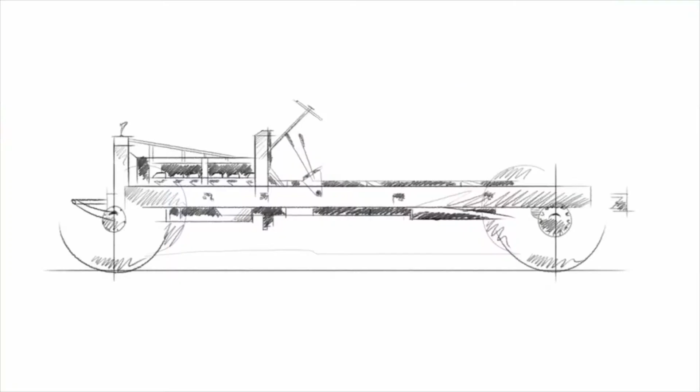The vision of Sir Henry Royce, one of our founding forefathers, was to create the best rolling chassis in the world. The House of Rolls-Royce was built on this bedrock of engineering excellence. The bodywork which enveloped these chassis was the preserve of coach builders who worked hand in hand with the commissioning patron, and these motor cars reflected the character of that coach builder and the personality and wishes of the client.

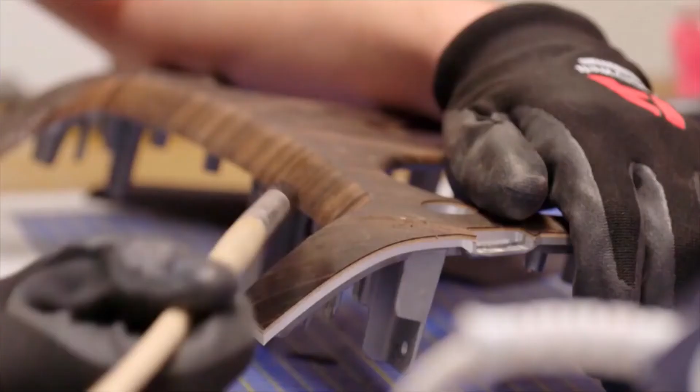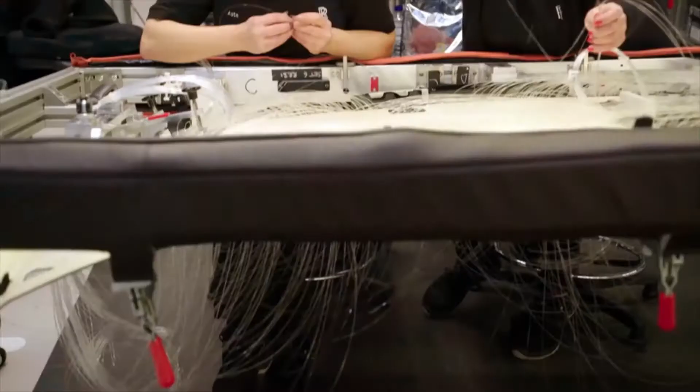Today, Rolls-Royce continues to imbue its products with meaning. Our motor cars serve as a canvas on which clients reflect their personal tastes, express ambitions, and often define legacies. The craftspeople at the home of Rolls-Royce are experts in interpreting the lifestyles of these remarkable women and men, which has resulted in ever more ambitious commissions reaching well beyond the existing scope of our bespoke competencies and resources. This has led us into the rarefied realm of contemporary coach building and the establishment of a permanent department within our company called Rolls-Royce Coachbuild.

It all starts here in this room, the atelier at the home of Rolls-Royce in Goodwood, England. Here we meet with our clients and discuss their thoughts and wishes about their Coachbuild project. Early sketches are drawn by our designers, and formative conversations regarding materials, colors, and other creative aspects of the project are determined.

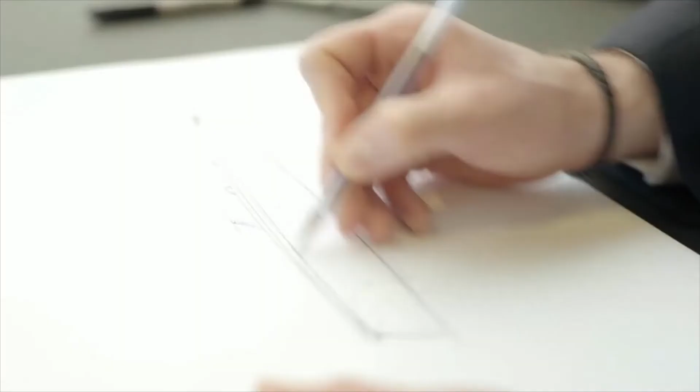Contemporary coach building at Rolls-Royce is the automotive equivalent of haute couture. It is the opportunity to move beyond the usual constraints and bounds and create something truly remarkable. We are an historic brand, and in many ways we are influenced by our 116 years legacy. But we are not bound by it.

In 2017 we introduced Sweptail, which defined the dawn of the contemporary coach building movement. Sweptail set a new watermark of potential and ignited a fascination among a small group of 3 clients who approached us to discover if they, too, could collaborate on a unique coach build commission with us.

Our designers had a long-held ambition to create a contemporary expression of the boat tail typology, where coach builders of old would graft the hull forms of sailing boats onto the rolling chassis of a Rolls-Royce. When the idea of this design direction was proposed, the 3 patrons were of one mind. They shared a single demand: show me something that I have never seen before. And Rolls-Royce Boattail was conceived.

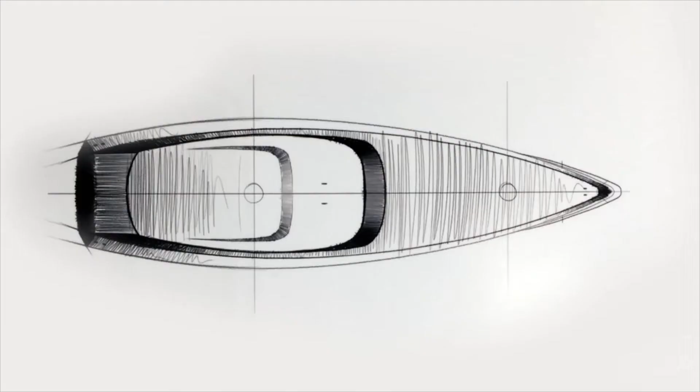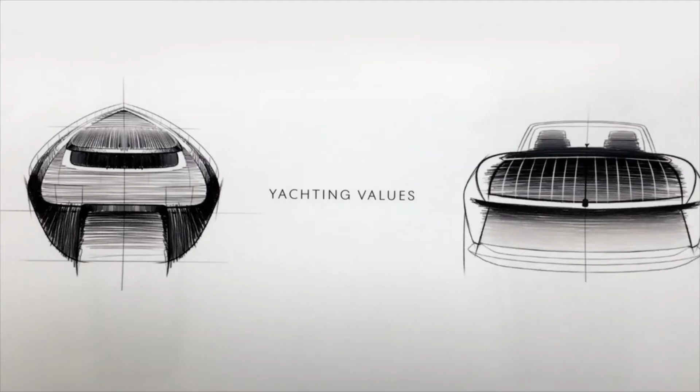Boattail is a particularly special historic body style. It has this unique form with a tapering rear that really converges on centerline. There has never been a contemporary interpretation of this particular body style, and that's what we set out to achieve with the modern commission Boattail.

These 3 clients shared a deep appreciation of contemporary nautical design. J-class yachts, regarded as one of the most beautiful boats ever made, became a touchstone of the design. Together with these clients, an agreement was reached whereby 3 cars would share a common body shape, but each would be highly personalized, reflecting the character of each of the individual commissioning patrons. And the result is truly transformative, an object that makes a permanent statement and sets itself apart from anything that has gone before.

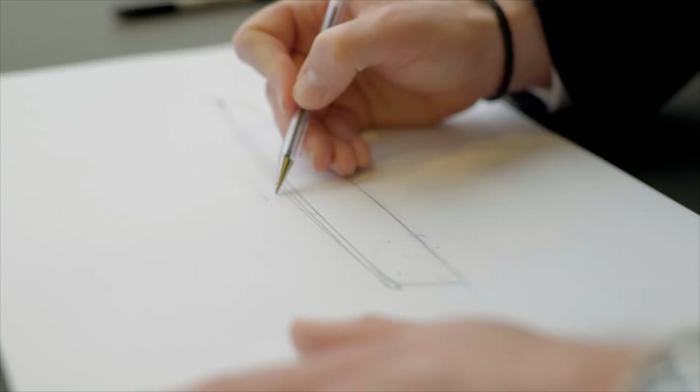We work sequentially, so when we do sketch work, we're in 2D, that comes first. You're working with the overall line work of the car, the key lines of the car, let's say. This very clean, elegant form, very graceful, but at the same time daringly modern. There is this wonderful sense of taper in side view, this beautiful feeling of reduction to the overall surfaces and forms.

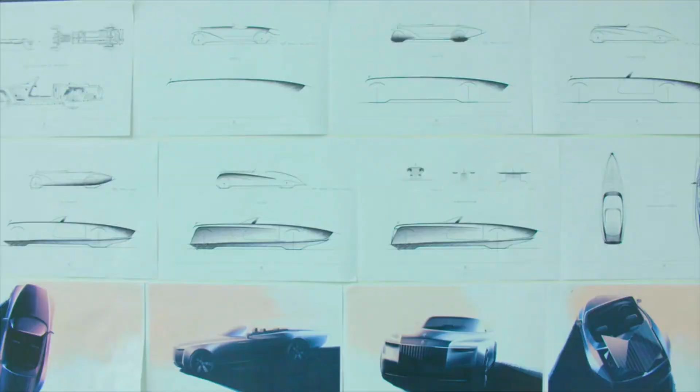Once, together with the client, we have concluded the design on paper, we then create a full-size sculpture of the car in clay.

The clay process, I guess, largely speaking, is working within the last 10% of the design. You're really working with the minutiae of detail, line refinement, and surface control. And actually it's those two characteristics, probably more so than anything, that you are optimizing: quality of line, but with it then the quality of surface. Clay is just a fantastic medium to do that in because it's malleable and also because it's real time. You're doing it there in front of you.

You're moving and there's a certain latitude within which you're working, and then as you near the end of that phase, you're bringing it down to the finer movements and the finer refinements.

A foil, or Di-Noc as it's called in the industry, replicates the real surface of the car, the painted surface of the car.

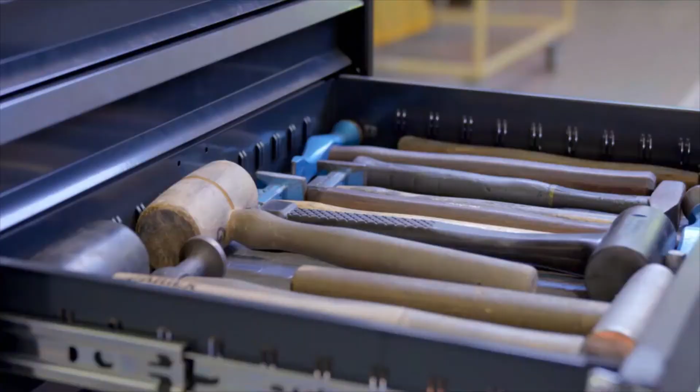A living canvas is created by hand beating and honing metal. And the resulting aluminium body is created with a clarity of surface and continuation of line that is unable to be achieved by machine alone.

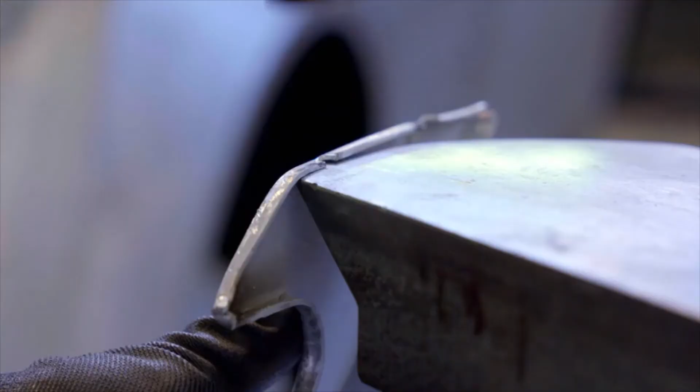The car very purposefully projects a strong vision of modernity, but the real juxtaposition is that this is paired with a very historic process of realization.

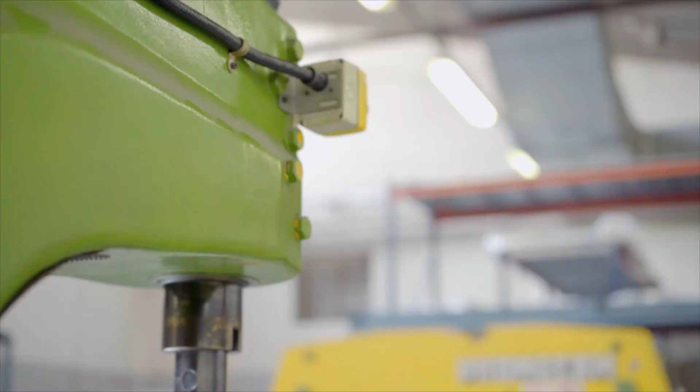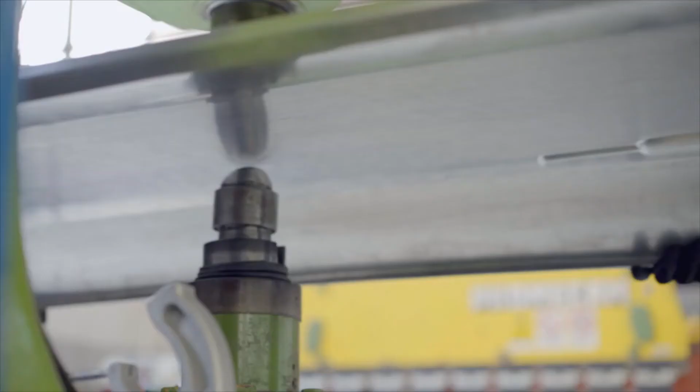The car starts its life with just sheet metal, and first you have to create form to that metal, and that takes place through, in this instance, the hammer forming process.

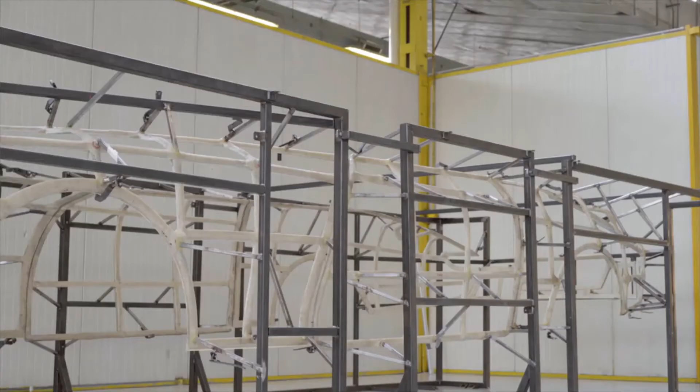We are realizing a car by hand. You would never, through the process of industrialization, expect to find the creative hand of the team, and indeed the clients, still involved at this stage.

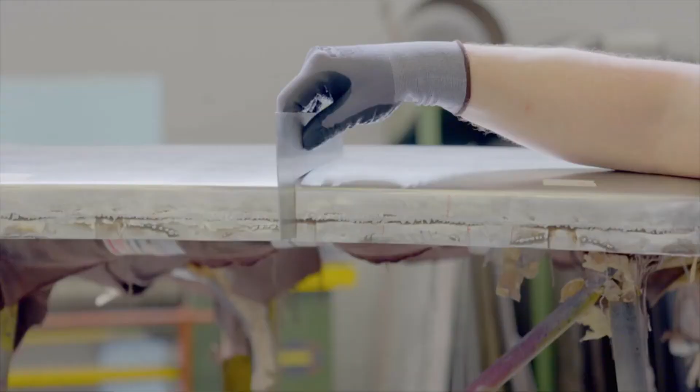Building a car by hand allows the human soul to pass through the hands that are charged with shaping the metal and into the car. Industrialization is clinical, it's carefully controlled, but it's also soulless. And what we are doing here is the complete opposite of that.

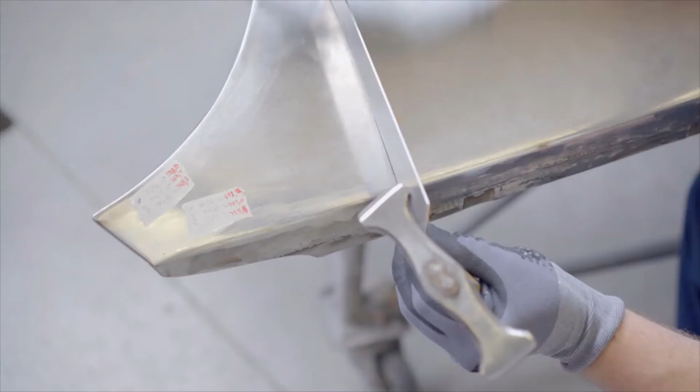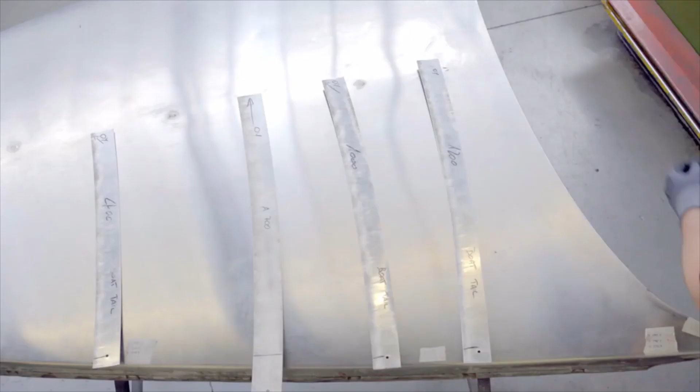I think true perfection can almost be seen as sterile. The car, by way of its definition, is never entirely perfect, but somewhere in there is the perfect imperfection.

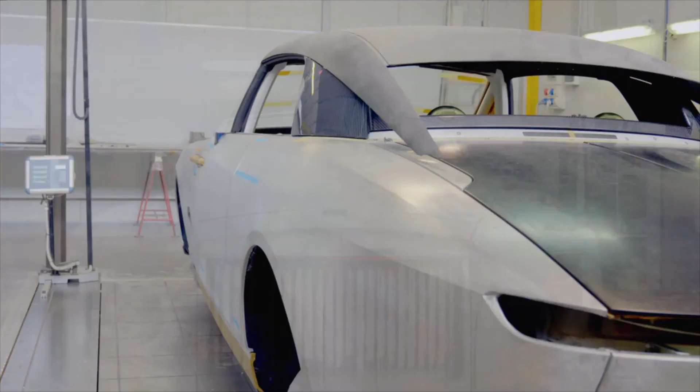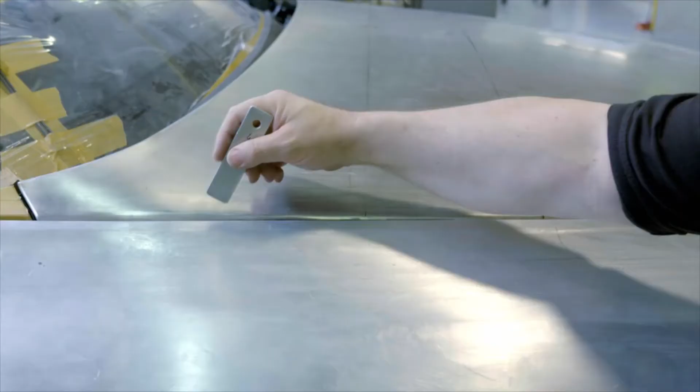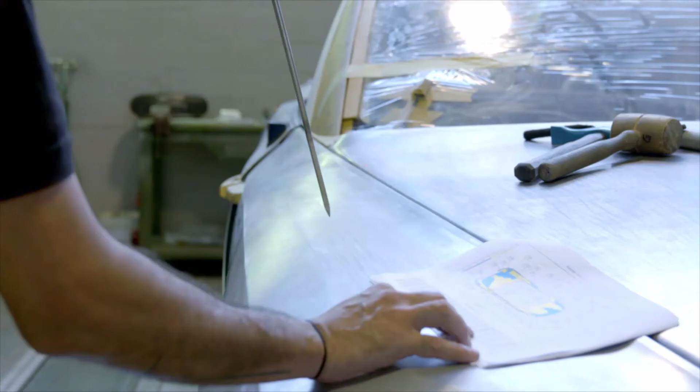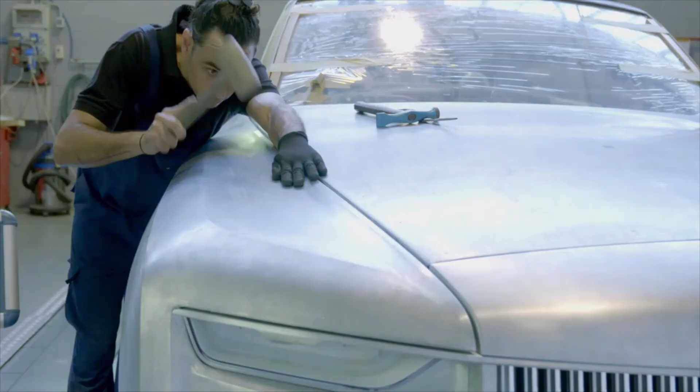The metal is formed and it's fettled, it's checked and then it's refettled and it's rechecked until you arrive close to the final definition of the exterior surface of the car. And that is an exhaustive process, relying on the intuition and the intervention of the human hand and the human eye. And that's a really incredible thing.

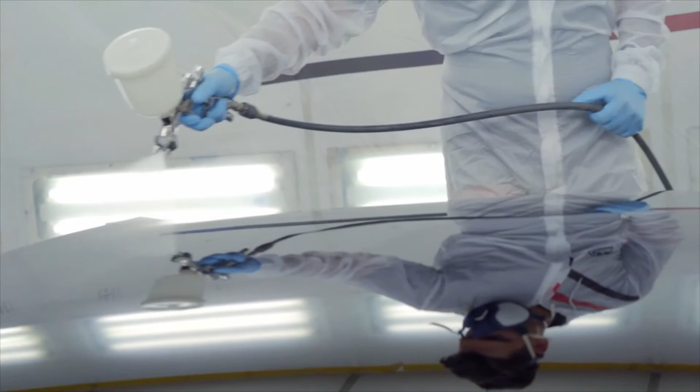The bonnet is sprayed by hand, and it has this wonderful transition from a dark color to a lighter shade of blue. It's a canvas that represents the human hand that created it.

The first of 3 boat tails is a culmination of our patrons' exceptional thoughts, concepts and items which form the perfect experience. It truly personifies connoisseurship.

The client couple who commissioned Rolls-Royce Coachbuild to fashion this boat tail wished to create a celebration of life and success, a statement of joyfulness, a moving work of art to enjoy with their family and friends.

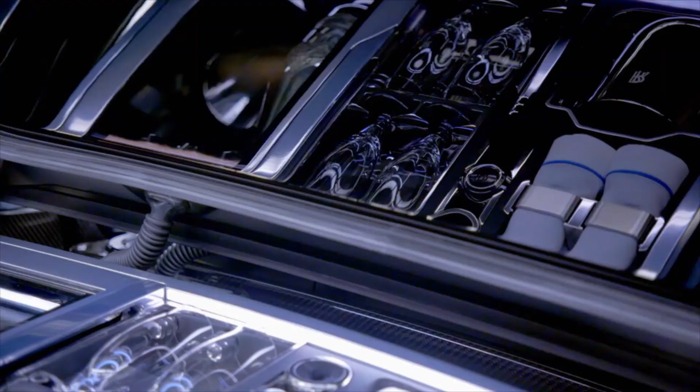And in response, the rear deck is designed to house a highly ambitious concept never seen before in the automotive world. It opens in a butterfly gesture to reveal a treasure chest of moving parts, an intricate and generous hosting suite. This area becomes a celebratory focal point for shared occasions and is appointed with the perfect accoutrements for a true al fresco Rolls-Royce dining experience.

This particular client is an aficionado of watches and has commissioned 2 extraordinary timepieces for his boat tail. At the client's request, the House of Rolls-Royce and the House of Bovet have worked hand in hand to create exquisite, groundbreaking timepieces that reimagine Rolls-Royce's iconic centerpiece, the dashboard clock.

What is particularly special about this commission is that it links to our heritage. And it tells a wonderful story of the historic boat tail body style, but our modern interpretation is just that. It's thoroughly contemporary, but at the same time, it still evokes the qualities of the historic body style.

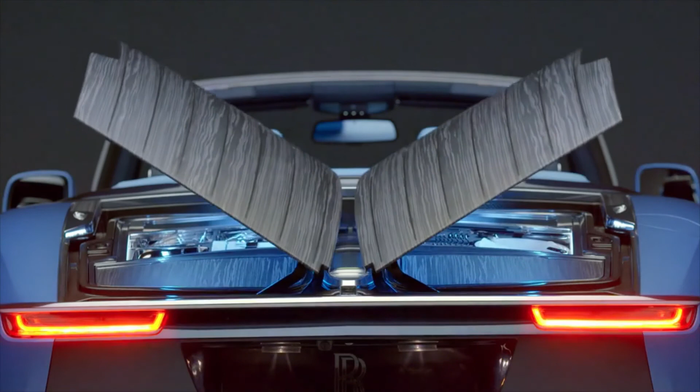This kind of project is not a matter of money. It's just about perfection.